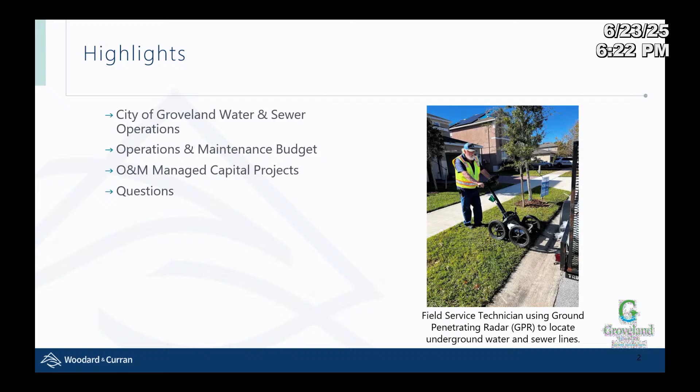City of Groveland, the contract was initiated in 2019. At the time it was initiated, the city had 25 staff members. When Woodard and Curran took over, the staff was reduced to 19 to run it as efficiently as we possibly could. The area is 55 square miles is the service area that we cover. At the time of the contract, the estimated population was about 18,000. Current population is right around 26,000. That is a 44% increase in the 7 years.

Currently, there are 21 team members. We started initially with 19; we're up to 21 team members. In the 7 years, we've only had a 10% growth with our staff.

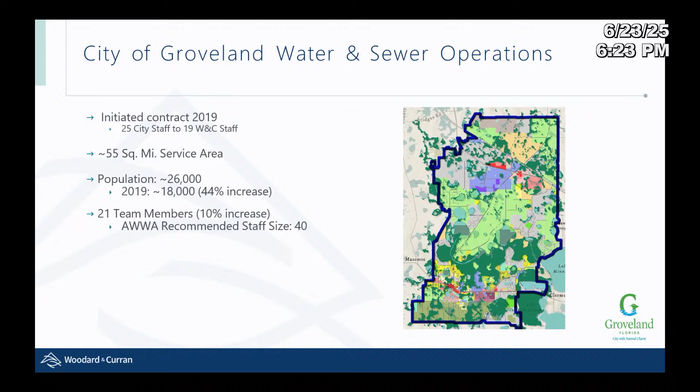The American Water Works Association, AWWA, recommends a staff size of 40 for the service area, for the services that are provided, and for the level of customer service that you want your customers to have. Right now, 40 is on a lower level - if you wanted higher customer service, we'd actually have to add more staff than that. That's the recommendation by AWWA, for a size of 40. We're currently doing it with 21.

Let's give you the numbers of what we do. We have customer service. We have 11,206 drinking water customers, 4,279 reclaim - that's your irrigation water - and then 7,709 sewer customers. Our staff completed 5,263 service orders last year; those are the customers calling in with various items. Last month we read over 15,485 meter reads.

And then we have non-pay disconnects that our customer service takes on. That can range from 55 to, the most recent one, we had 320 disconnects that we had to do for non-pays. Now, this is manual - we go around, we shut everybody off, that's on the list, and then we turn around and have to turn them back on. So that's very time-consuming.

For our utility locates and inspections, we have one individual that completed 2,822 locates last year. We have another individual who does our new construction inspections, and he completed 604 new construction inspections last year. He also manages the locator. So those two individuals have very full plates, and they are go, go, go every day.

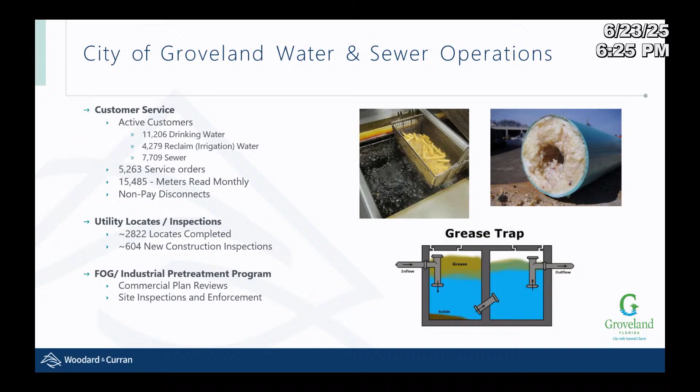We also take care of the FOG, which is your fats, oil, grease, and your industrial pretreatment program. We have one individual reviewing commercial plans for making sure that they're putting in grease intercepts. Restaurants - we're catching the grease so it doesn't get into the sewer system. And as far as industrial, making sure that the chemicals that could kill our plants are being caught, various items are being caught before they get to our plants to do damage. The individual also does site inspections and enforcement for the pretreatment program, going out inspecting the different grease traps and mechanisms in place at these businesses to catch the bad stuff before it hits us.

Our wastewater facilities - we have 64 sanitary sewer lift stations. These are out there in the neighborhoods that gather the water and push it to other lift stations and finally to our plants for treatment. We have 2 wastewater treatment facilities for a combined 1.98 million gallon capacity.

We have the Sampe plant, which currently is 109% over capacity. Now, people think that means we're having an overflow. In reality, that is the design capacity - what it was planned for to make it work at its optimum. At 109%, we still have a safety factor, where our safety factor generally is 1.5%. So we're already into our safety factor - that would be like storm surges, water getting into the system, just overwhelming it. We've gone from 95% to 109% in 6 months, so we're definitely seeing a lot more water here in the last few months, and it's growing month to month. We're seeing an increase.

The Sunshine plant is currently at 55% capacity. There is a project to reroute one of the force mains to direct flow from the Sampe plant to the Sunshine plant. That will relieve about 100 to 120,000 gallons a day. Take that out of the Sampe plant, you're still at about 99% capacity. So there is some relief, but with the growth happening up on the north end, it's going to go beyond capacity real quick.

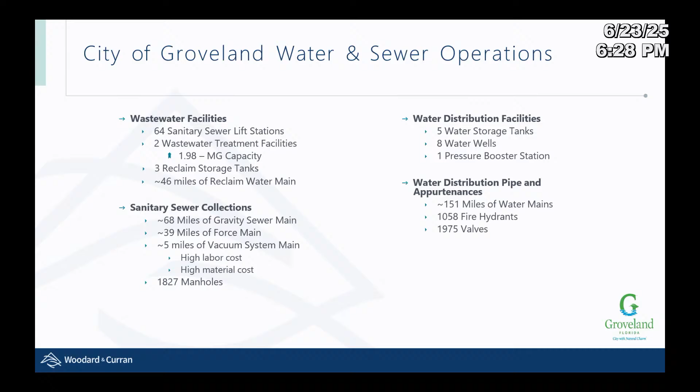For our contracts operation and maintenance budget, fiscal year 2025, which is year 6 of our contract, the budget was $4,385,269. The proposed fiscal year 2026 budget is $5,302,982. That's a difference of $917,712. We looked at the Raftelis study done by the city last year, which showed an increase for fiscal year 2026 at 24.7%. Our proposed budget has only an increase of 21.2%.

The Raftelis study also showed an increase of 4 staff members in 2025 and 4 more in 2026. What actually occurred is in 2025, 2 of the staff members were added - our assistant project manager and our lead wastewater operator. The other 2 positions were deferred to 2026.

Our labor makes up about 1/3 of that increase, which is $297,000. This includes a 4% increase for staff and market salary adjustments for our licensed operators, in addition to 3 staff members added as of October 1st, 2025, and 3 staff members added April 1st, 2026. The first round of staff members will be our FOG and Industrial Pretreatment Program Coordinator.

Good. Next slide. So we're going to look at a couple of our highlights of what some of the things that changed in this year's budget are.

One of the bigger ones we have is disinfection and chlorination. Now, this is an important one. The decision was made to get rid of the gas cylinders at our water treatment plants, the chlorine gas, for safety.

We have up here at the park, the ball fields, a tank that had chlorine gas, and the safety issue was to remove those from there to protect the citizens.

So we did that at our water plants 1 and 2, removing those gas containers and switching over to sodium hypochlorite.

Sodium hypochlorite does cost more than the gas chlorine, but the safety factor is what we're paying for on that. So there is a $22,000 increase on that.

We do have equipment rental. We occasionally have to rent a lift for performing elevated maintenance. This is new for us, so we went ahead and threw some money in there.

When you look at our budget, it's going to be a big percentage jump from 0 to $2,500, so that's why it's thrown in there. Hand tools, $8,500.

This is for the purchase of tools for the additional personnel and equipment, and equipping new vehicles. Rich will get into the new vehicles as part of the capital, I believe.

Sub-instrumentation, $31,500. This is the installation of a redundant SCADA server.

Our SCADA is what controls our plants. It's the computer programs that are controlling our plants and alarming us when issues are going on. So we have one, and we're adding a second one in event of power failures or power surges.

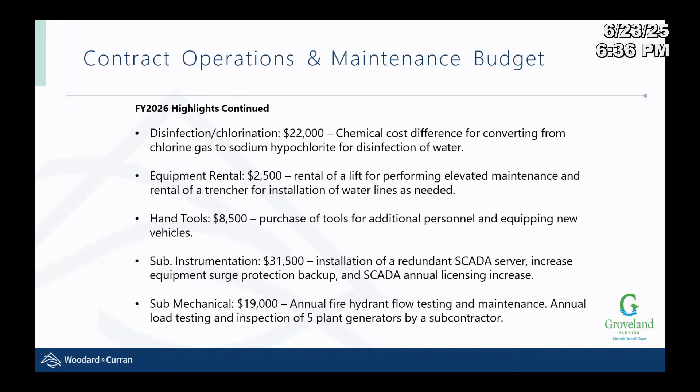Sludge hauling is up $48,000. Sludge hauling is the dewatering and removal of solids from our wastewater plants. These are the solids coming in that we have to get out of the plant, and they get hauled off to a landfill. With the increased growth in the area, we're seeing an increased amount of loads of solids coming into the plant that we have to remove, so this reflects removing those solids with the growth.

Our sludge tipping fee is up $15,000. The first sludge hauling item was just out of the plants. This sludge tipping fee is what we have to do to get the solids out of our lift stations. We separated it so it's easier for us to track. This is cleaning the lift stations, getting the solids out, and getting the solids and buildup out of our headworks at the plants. So this is definitely separate. We also have other chambers that we have to clean out regularly where solids have built up.

Outside lab services is increasing by $20,000. This increase is due to our fats, oil, and grease and industrial pretreatment compliance, as well as next year's lead and copper water sampling. This is still required by DEP, even though we've met the EPA requirement for lead services. DEP still requires us to do the lead and copper water sampling at this time. Until the laws change, we have to do that every couple of years, and next year is that year, so there is additional sampling that has to occur.

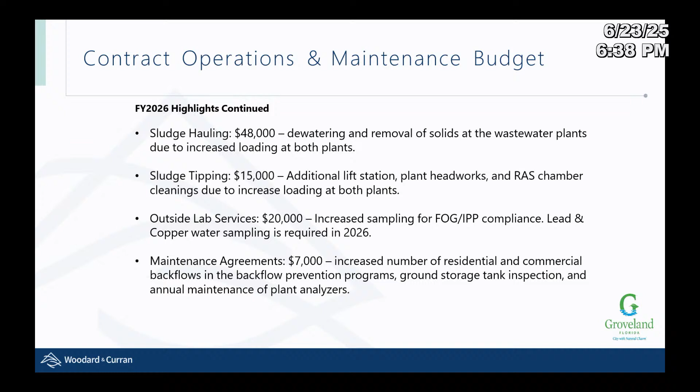Another operational increase is our travel expenses, $3,500. This is the increased travel for engineering and technical support for the plant upgrade projects going on. We are going to have to bring in staff more regularly for inspections and make sure everything's going the way it's supposed to.

Vehicle insurance is increasing by $12,400. This is for the addition of 6 vehicles for fiscal year 2026. To go with that, diesel and fuel is going up as well, to $20,500, additional for the additional 6 vehicles.

Going to touch base on some of our O&M capital projects that were completed by our staff here, not contracted out, that were completed by Woodard and Curran.

One of the first things we completed was our arc flash evaluation. This is where they go out and evaluate all our lift stations and plants, looking for anywhere there could be an electrical area where electricity will arc, hence the arc flash, from a unit to a person or from unit to unit. They're evaluating these and making safety recommendations for repairs and replacement.

We completed a water plant 3 and 5 pressure blow-off modifications. If the pressure gets too much at these water plants, it will relieve pressure.

We have lift station rehabilitations at 2 of our lift stations. Lift stations 3 and 11 were completed this year.

We completed the chlorine gas to sodium hypochlorite conversion at water plants 1 and 2. We did start the conversion at plant Sampe as well, so we're starting to supplement sodium hypochlorite in lieu of chlorine gas. We're still trying to balance that out before we get rid of the chlorine gas.

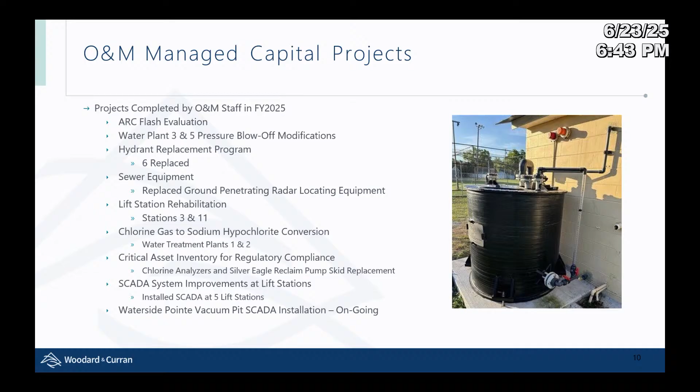We've got some anticipated projects to be managed by O&M. We have the flow meter installations and replacements. These will be at our water plants. These flow meters are required by DEP so we can get the flow data we need for the consumptive use permit, which determines how much water we're allowed by the state to pull out of the aquifer to supply the people. So we have to be able to show accurate data.

Some of our areas don't have meters on them currently. Some of our lines are so outdated that there's no way to calibrate them any longer, so we have to replace them so we can get accurate numbers for DEP.

Lift station 38 repairs. It's an older one, it's got a lot of corrosion in there. A lot of the wastewater creates hydrogen sulfide, which likes metal and likes to eat up metal. So the idea is we'll go in there, replace the piping inside the wet well with new piping, and replace some of our hangers so they're not as corroded, making it more dependable.

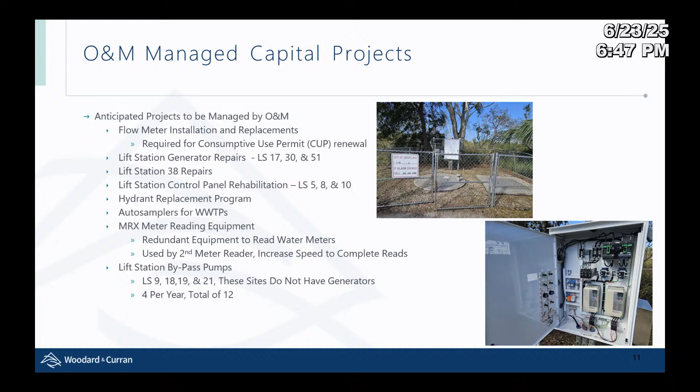Sorry to run through it pretty quick. Are there any questions? I do want to use, if I could, real quickly, the context that we showed you.

Some numbers about staffing. I mentioned going from 25 Groveland employees down to 19 Woodard and Curran employees. We've grown that to 21. The American Water Works Association, an organization we utilize nationally for best management practices and developing metrics and performance measures, says that according to their numbers on the size of the Groveland system, having 5 plants, 4 of which are operational, 8 wells, 2 different wastewater plants, 2 different reclaim plants, and 26,000 people, you should have 40 people on this team.

You have 21. So I want to emphasize we are doing more with less purposely, and as we develop this budget, just as last year, even with the rate structure—bear in mind everything you just saw is tied to your existing customers and the rates they pay, all of the operation and maintenance of the systems. Based on all of that, we really should have more staff, but we continue to be conservative and not grow staff too quickly, even in the proposed budget. It adds 3 in the new budget year, with 3 more to follow at mid-year if the revenues support that. We have to coordinate this with the finance department to ensure the revenues are there to offset the expenses, as the enterprise fund requires.

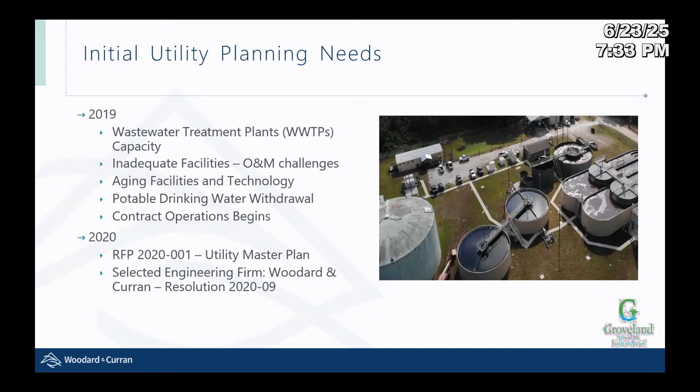This is when contract operations began. Woodard and Curran started to look under the hood and say, what other infrastructure needs do we have? The city issued an RFP for master planning, and Woodard and Curran was selected.

In 2020 we started that planning process. At the same time, operations was kicking up, and we started to really look at asset management and get an understanding of the system, where it's located physically, the condition of it, the condition of critical assets, and take these larger identified projects and needs and start to get them into a planning process for funding, planning, design, and construction. Then we'll go through those key projects that are underway now.

So what TJ referenced was a system that was struggling to meet compliance, and we were able to enhance performance of the existing facilities, working with what we had, to the point where the city received a Plant Operation Excellence Award for Sampey. I wanted to mention we purposely highlighted this particular award, provided by the Florida Department of Environmental Protection for operations of the Sampey wastewater plant. The reason the City of Groveland received this award is it was recognized how we had managed to squeeze the last life out of this antiquated plant right before commencing the upgrade and expansion of the plant. That's much to the credit of the operations team.

I think it says a lot from a compliance standpoint when DEP looks at how you're managing your facilities, and if you're asking for improvements and upgrades that are needed, and the confidence and ability to operate the system.

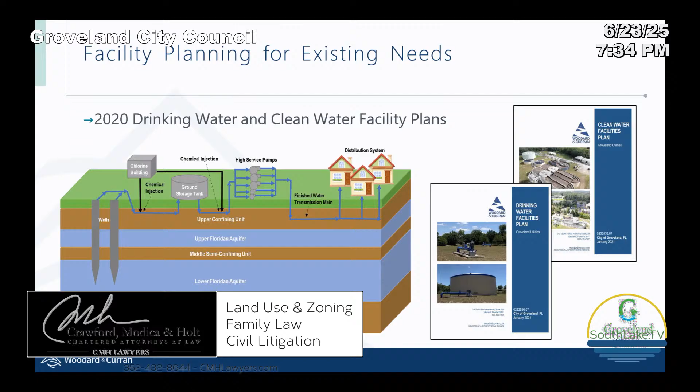So in 2020 we initiated, and I think council has seen these types of documents, facility planning documents. These are SRF program-related requirements. You basically develop a plan document to evaluate existing needs and then how you're going to finance those needs, so that you can borrow money through the SRF program, the State Revolving Fund Loan Program for clean water and drinking water. Clean water, as a refresher, is wastewater and reclaim systems, so it's a little counterintuitive. Drinking water is pretty straightforward.

So those plans, I want to emphasize there are two great things on this screen here. One of them is, what are the facilities plans? And Rich was just explaining, drinking water is exactly what it sounds like, and I'm glad they're cleaning the dirty water, that's what wastewater reclaim are. But also the graphic is timely, because the City of Groveland is putting in our first lower Floridan aquifer wells right now for Plant Number 6. So those will both be fed drinking water source from the lower aquifer.

And we have one also now at the Sunshine plant to help augment the supply of reclaim that consistently runs out at that plant. So seeing that lower aquifer tapped into, that is exactly what the City of Groveland is doing now for the first time.

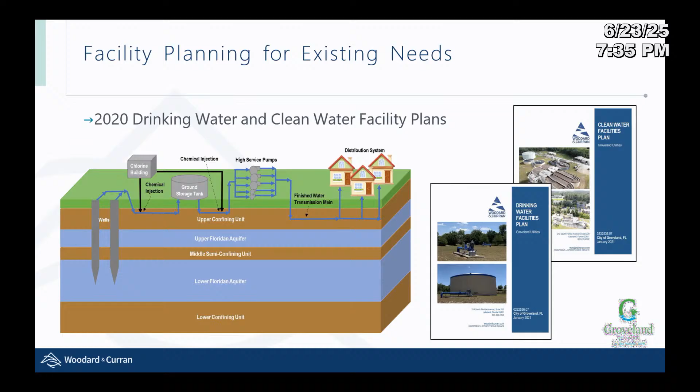Those facility plans require adoption by City Council. They were adopted in January of '21. Since that time, the city has advanced those projects through design. It takes time to design and permit these projects, and then secure funding for construction.

In a relatively short amount of time, about 4 years, the city has secured a lot of projects for these capital needs. So these original projects envisioned in 2019 are coming to fruition now. That's a pretty reasonable, if not somewhat aggressive cycle to get projects of this magnitude. It's something I think the city has done very well to secure, and Council has supported the funding and strategy for these projects.

These are the most significant needs identified initially. Now, at the same time, we wrapped up those facility plans that looked primarily at existing needs, some modest growth, because when you build a facility you don't just build it for the capacity you need tomorrow, you build it for something a little more in the future. The master plan really took a look at all those projects and then looked at the comp plan and what all the entitlements would mean if the city were to serve future development.

Some of that future development was already approved, some was in construction, so those weren't captured in the existing projects unless it were for flows to Sampey, for example—some of that was part of it. We created a vision for water utilities focused on growth management, looking at all the different pieces of the puzzle: alternative water supplies, reducing irrigation demand, and managing per capita.

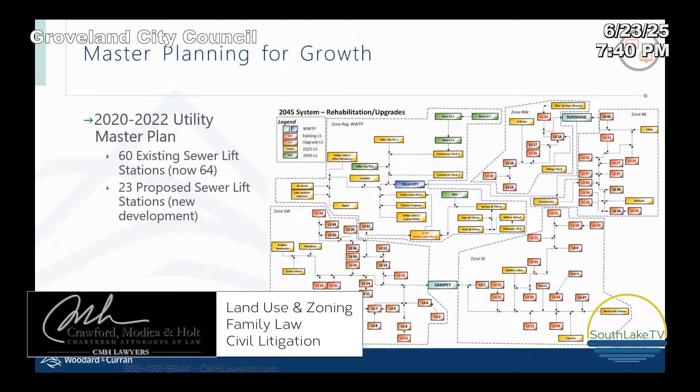It does create challenges with the hydraulics and the operation and maintenance of the system. Had there been a master plan, maybe there would have been a slightly different approach to managing that. Lift stations are a significant asset—we have recommendations for planned upgrades triggered by development and the need for that. We evaluated these assets in great detail, so it's a significant portion of the master plan.

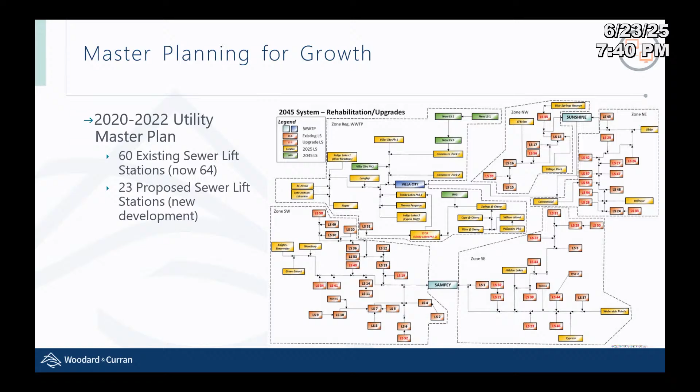At the same time, the utility planning team looked at development agreements as part of that master plan. What are the commitments based upon, the land use and entitlements? And then how are we going to manage capacity of the existing facilities and growth of those facilities and expansion, new projects, et cetera. So we looked closer at the development agreements and existing commitments to see what is really truly planned and approved. What is entitled, and a lot of that area is within Villa City, that area north of the Turnpike as well.

So there's a lot of entitlements there, but we don't have a very detailed plan. The master plan considered the potential there, and we incorporate that into the capital improvement plan from the standpoint of if those projects happen, this is what they would cost, but there's no financial commitment for that by the city at this time. And I'll turn over to TJ in a minute to talk about how we've looked at agreements differently.

And how, for the first time, I think the city started to look, a few years ago, at agreements, really to evaluate the potential impact and commitment that's in the agreement. So just because there's an agreement to provide service doesn't mean that the capacity is purchased or reserved. And that's a big distinction.

So concurrency review, and TJ's, I think, now an expert on concurrency law, right? But we've integrated this into our utility planning so that we understand what commitments we have, what obligations legally are there. And if there are developments that are looking to access capacity and it's not available, then we can write that into the agreement to some extent.

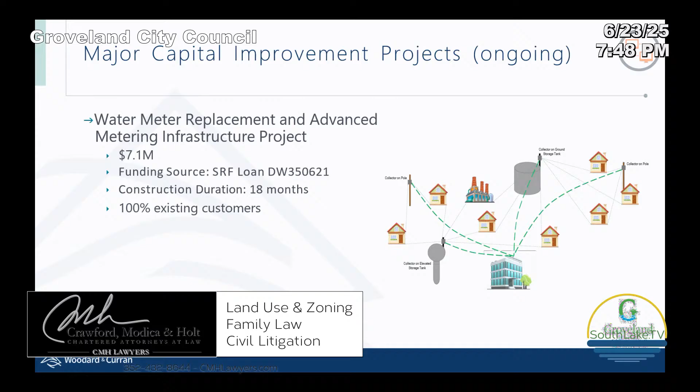I think we've talked about some of these, like the AMI water meter replacement program and AMI system. This project is ongoing, about 18 months. We think in total 7.1 million, funded through SRF. So utility revenues and the rate structure was designed around funding these projects, that service.

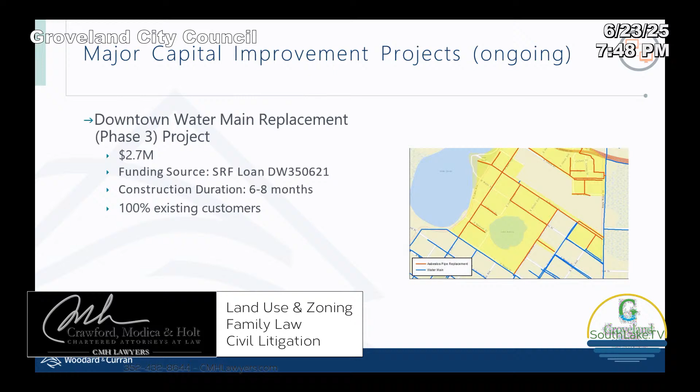Downtown water main replacement, I mentioned this earlier. There is still water main or pipes in the downtown, some of them asbestos-containing material, so that's always been a replacement program priority for the city, along with cast iron pipes. Cast iron typically results in a lot of corrosion, water main breaks and failures. It's aging infrastructure, part of the old Groveland, downtown Groveland. That's been an ongoing program. This is phase 3 of those replacements, and there's a phase 4 scheduled for a later date, again funded through SRF loans.

This was mentioned a little bit by Ben and TJ, but this was actually a requirement in the city's existing consumptive use permit to go to the lower Floridan aquifer to shift demand. So this is existing requirements, existing customers, as well as future consumption by new customers to shift some of that demand to the lower aquifer.

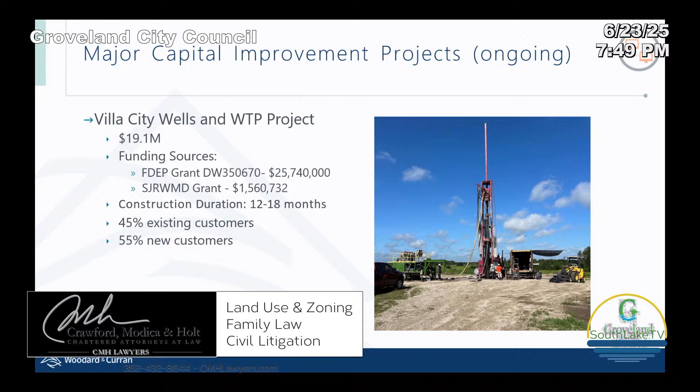That's serving the existing customers, and it has capacity to serve future customers. So that capacity is what's being built is what we refer to as phase one, which is meeting some of that near-term need. We did projections for the next 5 to 10 years of what is going to be needed. That facility supports that. Then after that would be a phase two that would really be driven by any new major development. That's all that would really trigger an upgrade to that.

So those new users would pay for that phase two. It's been designed to accommodate that. This was also part of a land acquisition from the Villa City property owner to do that. In the future, in theory, it would serve Villa City once they were ready to move forward as well, as part of a phase two or phase three expansion project.

The Sampey wastewater treatment plant expansion, I think we've talked about this a fair amount. You can see the funding sources. There's the Mascotte grant, which is that $4.95 million grant that TJ was referencing, a grant that DEP provided, awarded to Mascotte so that they could pay for their capacity reservation at your plant. So they're funding a portion of that through a grant that we were able to help Mascotte get, as well as a $6.5 million grant that Groveland was able to secure, and the rest is funded through an SRF loan.

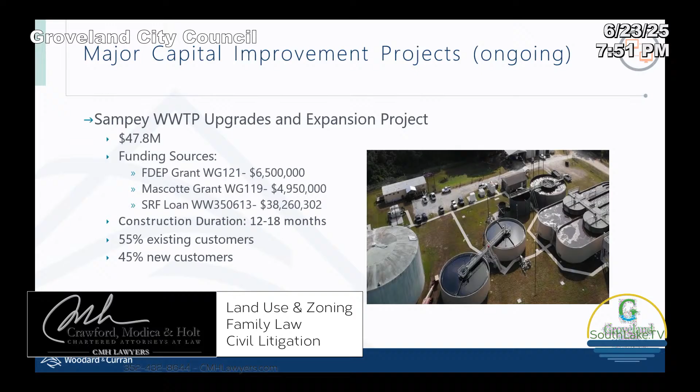We are monitoring the Florida state budget this week as Governor DeSantis works his magic to determine if our appropriation of $2 million will survive the veto list, which we're optimistic it will. So that could possibly be another $2 million toward this project that would come from an appropriations grant.

So these are significant projects, and I think the city... I'm proud that these projects are where they are in the time frame. They are needed. They're very much needed to maintain service and capacity.

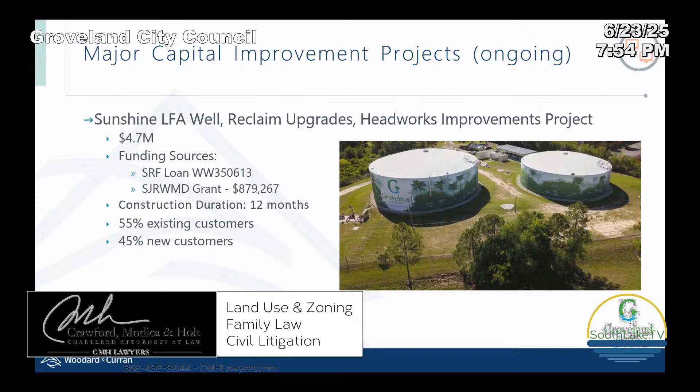So the well is important, the reclaim pump upgrades are important. Headworks is the wastewater plant, and that's to buy us time operationally to get as much out of this plant as we can as we near capacity, which we anticipate within 4 years. While we can strategize options, expanding this facility for wastewater is not a viable option. So we're examining that with you. There'll be more to follow, but I want to emphasize that because we're going to move into additional capital.

So those were the projects that were already identified in the facility plans. Those are projects that moved into construction and that are funded right now. Those are all built into the capital plan and the financial plan.

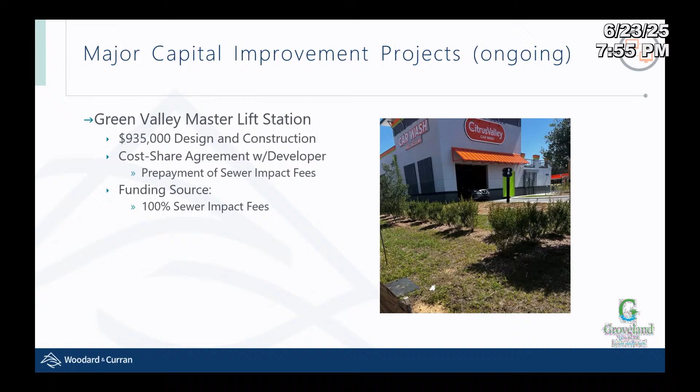This is a project which we identified as we were evaluating - sorry, I skipped Trinity Lakes. So Trinity Lakes Force Main Extension Project, TJ mentioned this earlier.

So Trinity Lakes was approved and committed. Sampey capacity at the time we did the facility plan was already at 80%. So future commitments and the pipeline to Sampey would send additional flows from phases 3 through 6. Phases 1 and 2 are already flowing to Sampey now - those are built and flowing. Phase 3 and 4 are under construction, and those remaining flows were originally planned to continue to go to Sampey, but we realized that capacity is not available based upon the timing of the Sampey upgrades.

So we looked at an alternative, which is to redirect those flows to the Sunshine plant. Because Trinity Lakes hadn't paid their impact fees, and it was pay-as-you-go, the impact fees for those remaining phases are adequate to pay for this extension project. So they are paying for the pipeline extension to Sunshine. It also gives them motivation because they realize they didn't purchase capacity - it wasn't guaranteed. So this project offers a solution to their need, and we have the financial mechanism to have them pay for that.

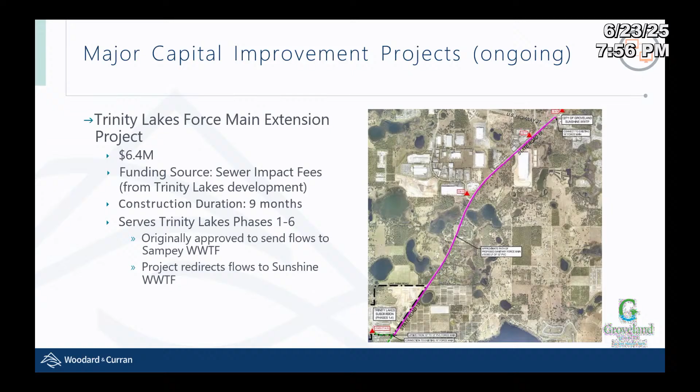So we're managing that project right now. Construction is anticipated to begin in the next month, we think. It's a 9-month project, and so we're going to send that to the Sunshine plant.

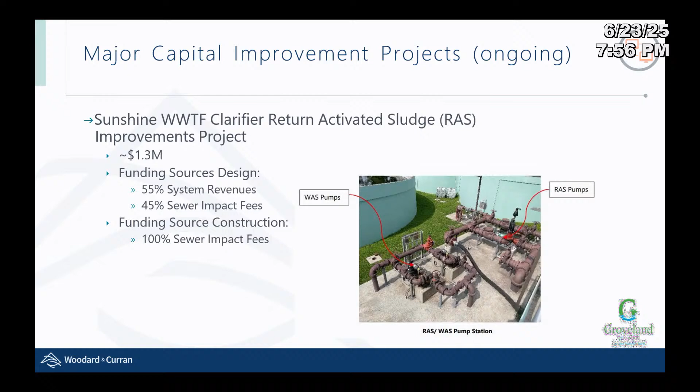At the same time, we evaluated the Sunshine plant this year to look at whether it can support that additional capacity, and we identified some issues at the plant. So this is a bit of an unanticipated project - it's a $1.3 million design, permitting, and construction upgrade to address what we call the clarifier return activated sludge system. Lots of new fancy terms.

But it's basically handling the sludge from the clarifiers, and currently there's inadequate capacity, resulting in a lot of operation and maintenance need. This is running at the current plant capacity at 55%. So we can't realize the rest of that capacity, that remaining 45%, which really we should be running at 100%, but we can't realize more capacity until this project is done.

At the same time, we need to send Trinity Lakes flows there. So we're anticipating the need to do this project first, to time it with the Trinity Lakes Force Main Extension project. We also identified a bit of an issue with the hydraulic flows and the way the pipe network is configured. So we see this as a project that should be paid through by impact fees to realize that full capacity, because right now it serves the existing customers - this is an improvement to realize that remaining capacity.

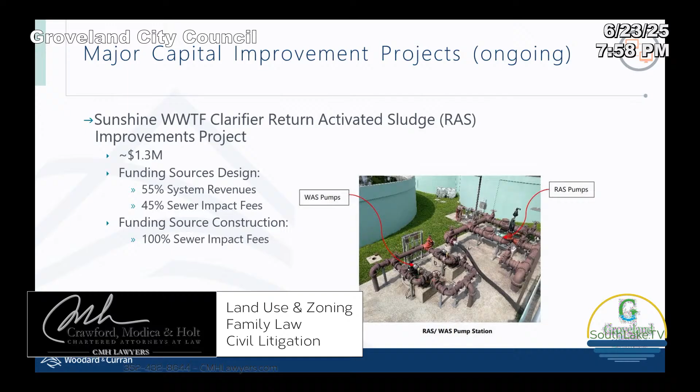This is another capital project the city is managing, currently under construction. This is the Green Valley lift station for the Green Valley Commons development. You just see a picture of the car wash here.

This is under development. When reviewing the site development plan applications, the city decided this development would be better served by a master lift station that met city standards. So through the mechanisms for sewer impact fee prepayment and negotiation through development agreements, the city developed a cost share agreement, essentially reimbursement of impact fees they prepay in exchange for constructing the project, which the city then takes over.

So we're in that process right now of construction, overseeing the project being built by the developer. This was a private lift station that is essentially being replaced with a city lift station, one that will meet city standards and then be operated by the city.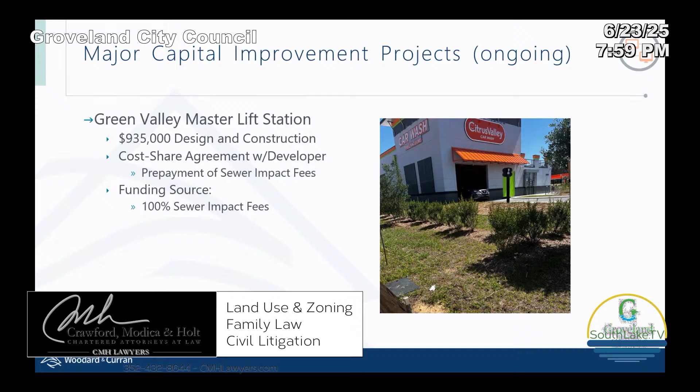We recognized that whenever you have a private lift station serving what will become multiple properties under different ownership, you've inherently created a problem that's just a matter of time to surface.

I'll use a real example from this past week. We got a call from Wendy's, yes the hamburger place, and then from Taco Bell right next door. They asked what the city was going to do about the wastewater issue they were having. We said that's not our lift station, it's a private lift station, contact the owner, who happens to also own the Walgreens property, which wasn't having a problem because it's higher up. That revealed just one example of several out parcels near Publix, all under separate ownership, sharing a private lift station. Who ultimately gets the call? City of Groveland.

In that case, luckily, they were able to respond. It was a power issue, and an electrician was able to repair it. It's functioning now. We saw the same thing coming when we realized 49 townhomes currently use that private lift station at Green Valley next to State Road 50.

You add a car wash to that, and they didn't have the capacity. Then you add a McDonald's, a Chipotle, a dental office, a Firestone, a storage facility, et cetera, and that was inherently going to become a problem. So city staff brought you an agreement, which the city council approved last year, to convert this to a public lift station. Funny enough, we've had another example up on US 27.

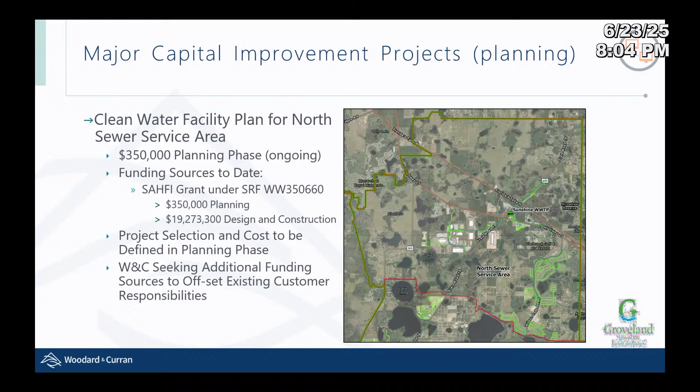I really enjoy the fact that the city of Groveland was able to strike. We had done the homework, we were prepared, we had everything aligned, and we used a potential threat to turn into an opportunity. That vulnerability of the Sunshine Plant, with its location next to wetlands and potential issues there, plus the operational issues associated with an aged plant, led to this SAHFI grant. To get a $19 million grant for clean water and then a $25 million grant for drinking water out of that same program was just an unbelievable turn of good opportunity for the city of Groveland. I want to emphasize we are always looking for that opportunity to capitalize, and in this case, it did lead to this grant opportunity.

So that vulnerability, like TJ said, enabled and qualified you for that grant funding. It's known that plant has limited capacity in terms of expansion, and it's also vulnerable to impacts due to flooding and other natural disasters.

So with this facility plan, it's looking primarily at the northern service area, focusing on wastewater treatment capacity and the associated conveyance collection system for that. In the master plan, the need for an additional facility was identified, and the planning horizon was somewhere on the order of 7 years out before it needed to be online to support some of these new flows from planned development.

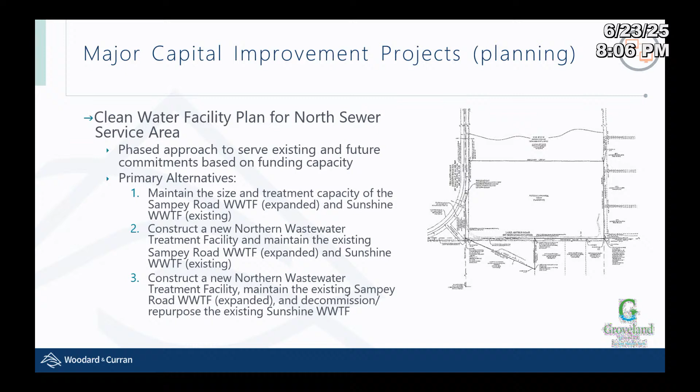So the first alternative is you maintain what you have. In order to do that, the Sunshine Wastewater Treatment Facility, being an aging plant, will need capital investments. We didn't contemplate that initially because we looked at the capacity and need, and it exceeds what can be accommodated there. But one alternative is to continue to manage that, though we'll have a city deficiency overall. We do consider that alternative because we want to look at what's the cost to upgrade Sunshine, which would be the existing customer investment, just to maintain the capacity that's there now. So we look at that investment there.

We look at a new facility, and then we have the expansion of Sampey to accommodate the southern facility, and we can shift flows in the interim between the two facilities with Trinity Lakes to manage that capacity.

Then what if we were to construct that new plant to accommodate some level of additional capacity? We think that's probably in the order of 1.5 to 2 MGD, depending on what we think those real commitments are.

The master plan identified more flows, but that would be future development, and we're not planning for projects that haven't been committed. So this goes back to what is truly the city's commitment.

The third alternative would be constructing a new facility, maintaining the Sampey capacity with that expanded capacity, and then decommissioning or repurposing the Sunshine facility. So we'll consider these three alternatives primarily, with some variations maybe.

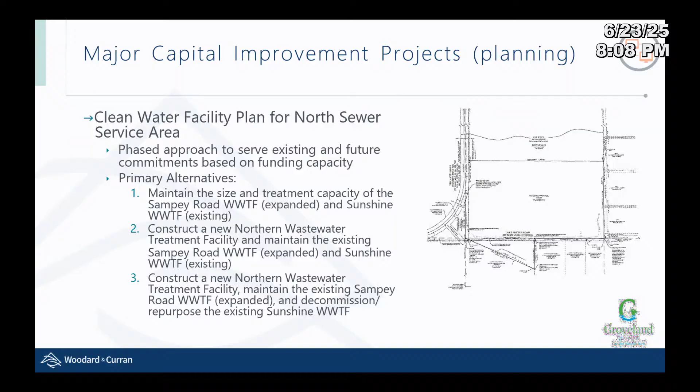One thing the council is probably aware of is there's 25 acres along Villa City Road that was secured for a facility, as part of the Villa City Development Agreement to provide land for utilities. In the master plan, we identified this location as central to development for that parcel, but also better serving the city's needs in the northern part of the city. So that's something to consider too—that land has already been secured and acquired by the city.

So that recaps ongoing projects and some of the planned significant projects. I'm sure you have lots of questions about that, and I'll try to buzz through the CIP budget, look at the amendment for 2025, and then look at the proposed FY26 budget. Everybody ready to keep going?

Right now there was a bank loan funding a portion of the capital improvement plan. We refer to this in the budget as the Bank Loan 2023, when it was taken. It was a $2 million bank loan, and there's some remaining funding that was reallocated to projects that had yet to be completed in the CIP. We tried to reprioritize and reallocate based on what hadn't been spent. There's need above and beyond that—I'll get into that in a minute.

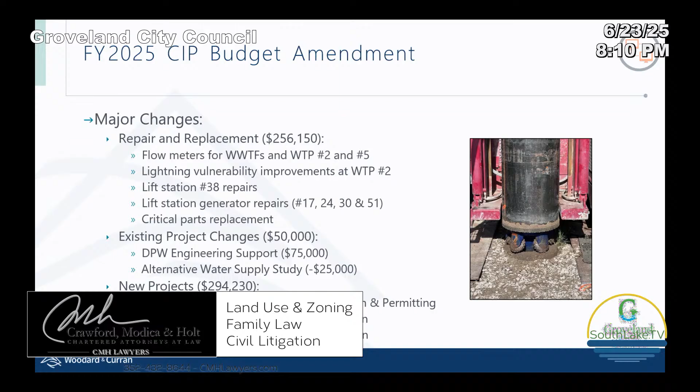Utility rate budget—the budget funded by utility rate revenues that come in—we looked at that, kind of at end of fiscal year: what has really been done, what can be done within the remaining funds, projects, and timeline for FY25. We reallocated about just over $250,000 there. We also directed and reallocated some water and sewer impact fees to new projects, and I'll go through those changes. The numbers in the prior slide match these if you total them. Now I'm showing you by category how those projects summarize.

So those projects totaling about $250,000 are repair and replacement—flow meters, as Ben mentioned earlier. They're going to install the flow meters, but they're budgeted in the capital plan here, for water treatment plants 2 and 5 and the wastewater plants. The lightning vulnerability assessment Ben mentioned earlier requires improvements at plant 2, scheduled to be completed within the 2025 budget. Lift station 38 repairs, generator repairs, critical parts replacement—we reshifted and reallocated some costs to make sure those projects got completed.

Now we had a long list of projects that had yet to be done, and I'll go through more slides. Seems to work better for you, Ben. I think we're wearing it out—maybe that's the battery life.

So a couple existing projects—we shifted some money around between a couple engineering planning projects. We were able to reduce and delay some scope that wasn't necessary right away, and reallocate that money. Then there's a couple new projects: we mentioned the sunshine improvements, that project from a couple slides ago, and we also wanted to do some initial planning for State Route 50 utility relocation. As a result of the relocation of State Route 50, we need to look at what utilities within that corridor, at least the higher priority ones, need to be addressed so they can be relocated to accommodate that schedule.

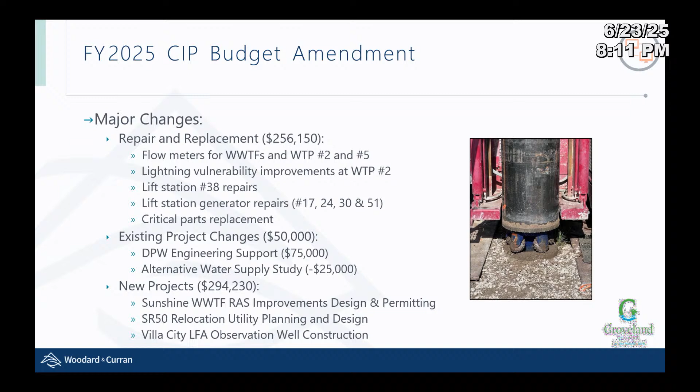And then there was just a miscellaneous project for Villa City observation wells that weren't funded through the grant, so we had to reallocate some money towards that.

What we wanted to point out within the existing capital plan is that there was a bank loan anticipated to be taken. It was a proposed loan to address about 19 projects, $3.5 million of projects. The financial plan was structured such that utility revenues wouldn't be at the level necessary in FY25, and they would pick up in FY26 to pick up some additional projects, but there was a certain number of projects that couldn't be funded in FY25 through the utility rate.

So the city was anticipating borrowing, and the borrowing didn't occur because of looking at all the other financial commitments, borrowing capacity, the line of credit for financing all these other large infrastructure projects we just went through. That borrowing was delayed, and at this point we're not anticipating that's feasible based upon the current revenue. So we're managing those projects, looking at and reprioritizing those, and I'll show that in just a minute. So that's basically a loan that wasn't taken.

There were 19 projects that essentially are on hold at the moment until funding's available. To that earlier question, have you prioritized - there's no fluff. In fact, to keep up with the depreciation issue mentioned earlier, the renewal and replacement, this bank loan originally was a strategy that was basically not going to be able to move forward. So the line of credit was more desperately needed for the cash flow to do the capital projects you've already seen tonight. Meanwhile, we have deferred projects that are prioritized. We run off that priority list. We'll continue to use it.

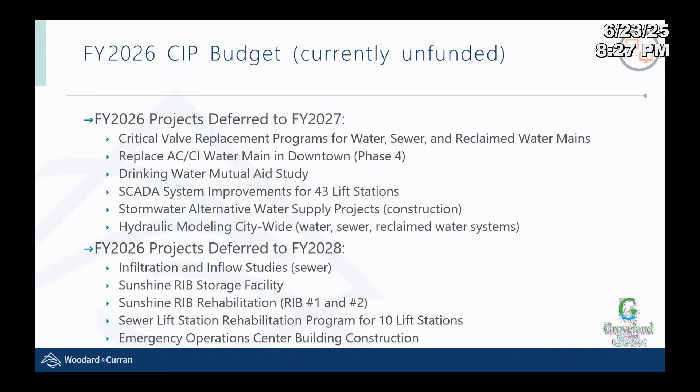This is just for information's sake. The capital plan is always something that's evolving. We're trying to reprioritize and shift things. So we think that these projects, while they'd be nice to have, can be deferred, and because we don't have much choice, we'd rather prioritize other needs in the city. So these are just an example of additional projects.

Anything to add? I'll just hit this one. There's a couple wrap-up slides here. This is the CIP portion of the utility that's funded by utility rates. So to recap, FY25 was $763,000. FY26 is that 1.37 number that you saw earlier.

And then FY27 is projected, based upon the 2024 rate study. It's not calibrated with revenues that have come in so far. There's been a lot of moving parts to that, and finance could speak to that if there's more questions - I think, to put them on the spot. But FY27, we're anticipating an anticipated revenue increase that would be allocated and directed towards capital projects. So that's what I'm trying to illustrate in these 3 fiscal years.

But this budget, just because it's budgeted at $1.6 million, doesn't mean it captures the need, because the need is much more, as we looked at the prior slides. But the positive note is that system revenues are improving. So we anticipate that these projects can be funded, more projects funded in the future on a cash flow basis. And when we look at the factors that affect that, it's rate increases, right.

The October rate increase had a profound impact on revenues and adjusted it to support these projects and the overall capital plan and rate study. And then we have growth in customers and ERUs. So we just took a snapshot to look at where that stands based upon the assumptions in the Raftelis rate study. Raftelis assumed some conservative measure for growth in customers, because that happens a lot in Groveland since you have significant growth. But we don't want to overestimate that, because then we overestimate revenue, and then we fall short if we don't have those customers.

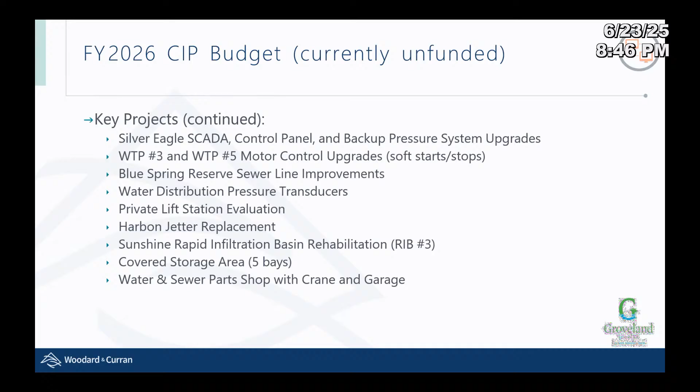I think, let's see, those are sewer impact projects. This is where we talk about bank loan deferred projects. So in a prior slide, that 3.5 million was 19 projects. And so you counted 14 here, or 15 here? Well, you've got 2 slides — under the key projects, and then the next page added some more to it, and I think it was 14. So I was just curious, and this may not be the right slide, but anyway.

I was just curious, out of the 19 that were rolling forward, what 5 might have been bypassed and for what reasons? So I just listed the key projects, I didn't list all of them. The 19 is really part of this overall deferred or delayed projects list, I just didn't list all 19.

Okay, yeah, the key projects were kind of the more significant ones. So when we say 19 projects, some of them are really small — some of them are equipment-type projects, but it's still capital. I was doing the numbers on it, and was curious if something had gotten left out and why it might have been left off. Yep. I think I'm good right now. Thank you.

A question about Sampey — if we're at 109% capacity right now, and if we switch over the water mains to Sunshine, the ones we can, it reduces it to 99%. Are we going to be functional through the current expansion? Are we going to be able to make it to the point where that project gets complete? Yeah, I'll let Ben speak to it since he operates it every day, but yes.

Yeah, so we do hit that 1.5 safety factor in there. Taking off the 120,000, it will give us that buffer while the project's being built — 18 to 24 months is the anticipated construction time. So we do hit that safety factor we're relying on in the meantime. It's a difference between permitted capacity and actual capacity — permitted capacity is what DEP says the facility should handle on a normal average day or average month basis, which is the 0.99 we've always referred to as being at 100% capacity. But the facility itself can actually process more per day or during peaks, wet weather, things like that. So that's the 0.5 buffer Ben's referring to, where we have some buffer while the new facility is being put online.